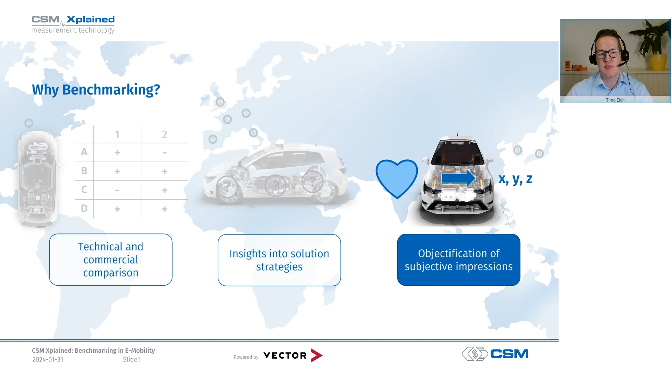Benchmarking is therefore also about translating these subjective impressions of end customers into measurable, comparable, and above all, objective parameters. Only then is it possible to make direct comparisons between different vehicle models. And overall, benchmarking is about a future-oriented analysis of the interests of the market and the models of competitors, as this allows the company's own model strategies to be aligned as profitably as possible.

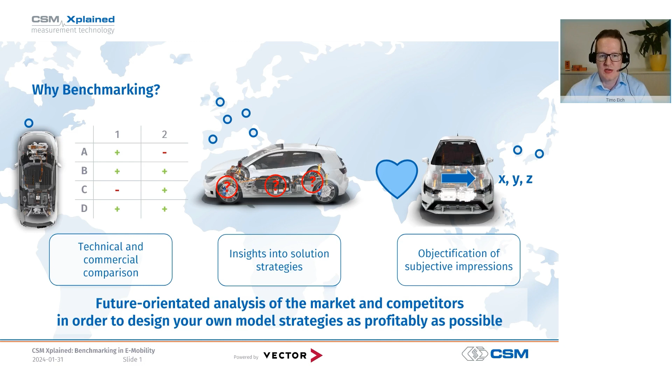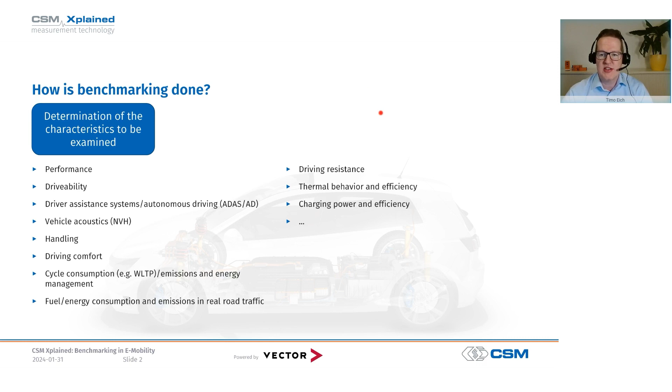How exactly is benchmarking implemented? Well, first of all, the properties to be examined are defined, and these can be a whole range of properties depending on whether we are aiming for overall vehicle benchmarking or even go down to component and small part level in design benchmarking. We have listed some typical characteristics here, ranging from performance, drivability, handling, driving comfort, energy consumption, vehicle acoustics, thermal behavior, charging performance, and so on. And as you can see, quite a lot comes together because behind each of these properties, there are many metrics that need to be measured and compared.

And behind these metrics are many physical measured variables, which then have to be measured in practice using sensors and measurement technology in the vehicle.

Here you can see an example of metrics for determining the performance of an e-axle. The metric to be determined is listed on the left-hand side here. For example, the maximum electrical power of the e-axle in the first line.

To determine the power, however, we need two real measured variables, namely high voltage and current, and then some complex math to calculate the active power. So for each of the metrics listed on the left, we must consider how precisely, meaning with which sensors and maybe some calculations, we can determine the corresponding metric.

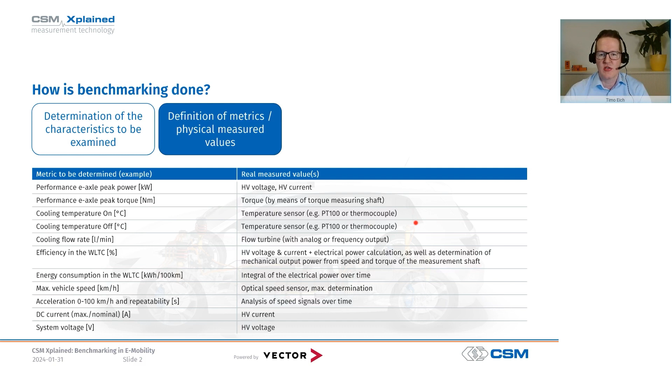Once we have determined the physical measured variables and the sensor required for this, we of course also need suitable measurement technology to which our sensors can be connected and read out.

And now it gets exciting because the measurements are typically carried out with a series production vehicle. And this production vehicle then has to be extensively instrumented. We will get to what's so difficult about this in a minute.

The measurements for benchmarking should be as realistic as possible and also as objective as possible. This means that the testing of different vehicle models should take place in standardized processes as far as possible. And for this purpose, defined environments are used.

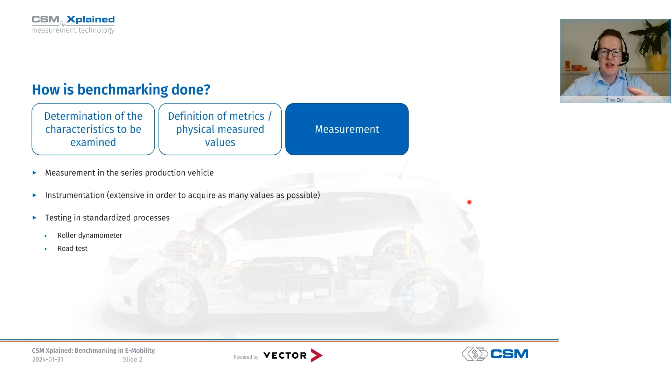For example, the road test is then driven in the standardized WLTP cycle, or the vehicle is placed on a roller dyno and driven through completely automatically. We do everything we can to ensure the best possible comparability of these standardized measurement procedures across different vehicle models.

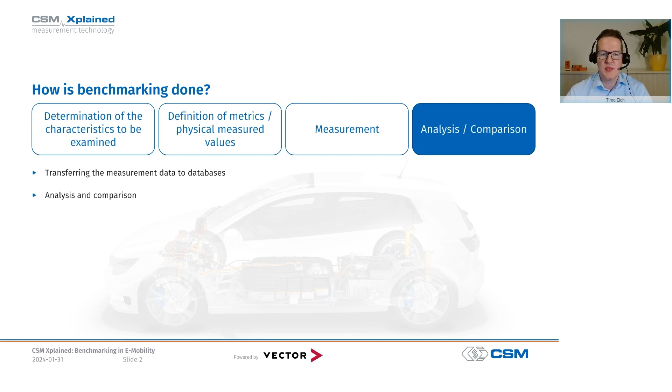And once the measurement data has been recorded, it is usually stored in huge databases where comprehensive calculations, analysis, and above all, comparisons can be carried out.

Now let's take a look at the challenges that benchmarking applications confront our measurement technology with. I earlier mentioned that the instrumentation of production vehicles can be quite exciting.

And this is because, unlike in development vehicles, we are dealing here with a fully coated vehicle, which now needs to be comprehensively instrumented. So the installation space for our measurement technology therefore becomes a real challenge.

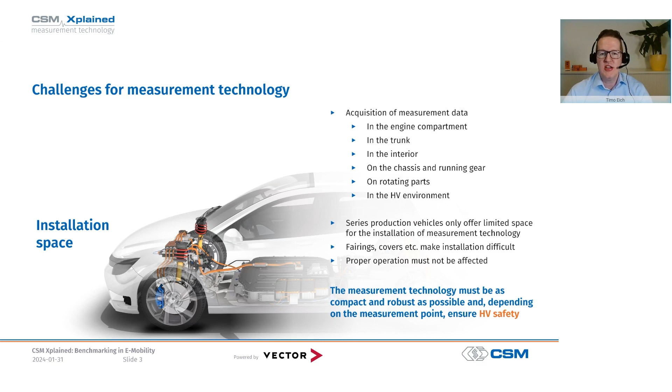And the measurement data has to be recorded everywhere in the vehicle, in the engine compartment, in the trunk, in the interior, on the chassis and the running gear, on rotating parts, and very important in e-mobility, in the high voltage environment. This means that the measurement technology used must be compact and robust, and that high voltage safety must also be guaranteed according to where we measure.

Such extremely complex instrumentation usually takes longer for a production vehicle than for a development vehicle and can quickly take several weeks. However, this also means that the measurement technology must be very easy to install.

In other words, it must offer suitable mounting aids for series production vehicles. Our CSM mini modules, for example, have housing eyelets for cable ties as a standard, which many of our customers find very practical. And the configuration of the measurement technology, the connection and the commissioning of the sensors, calibration, adjustment,

and so on, all of that must also be user-friendly and fast so that the measurement technology does not become a burden, but simplifies the instrumentation as much as possible.

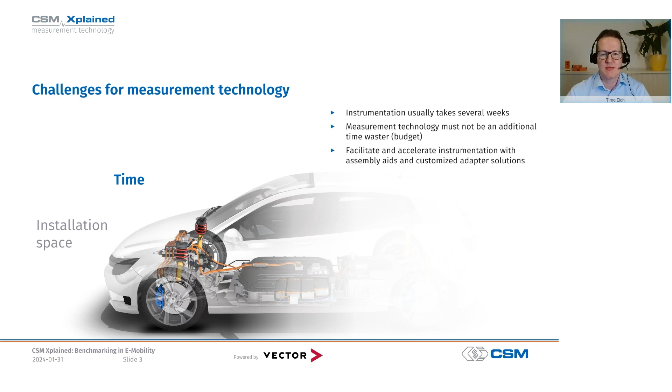Then, with the many different parameters that all need to be recorded at the same time, it is important to have flexible measurement technology that allows the recording of numerous different measured variables, and that the same measurement technology is always used for the different vehicle models, as well as for measurement on test bench and in road tests.

Because with the sometimes very small differences between the vehicle models, we need absolutely comparable measurement data, and it would be problematic if the differences in the measurement results were already caused by the use of different measurement systems.

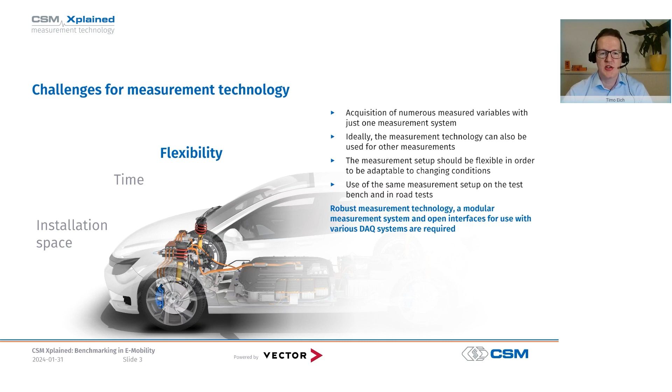In other words, we need robust and modular measurement technology for numerous measured variables, which can be easily combined into a flexible measurement system and quickly adapted to changing situations.

And we have already talked to some extent about the need for high measurement accuracy. This accuracy is simply important in order to reliably capture fast phenomena such as spikes and ripples and even the smallest differences in the measured values, both in terms of amplitude, accuracy, and time resolution. All in all, these are high demands on the measurement technology to be used.

So in the following, we take a brief look at the solutions and measurement modules our customers use to handle benchmarking applications.

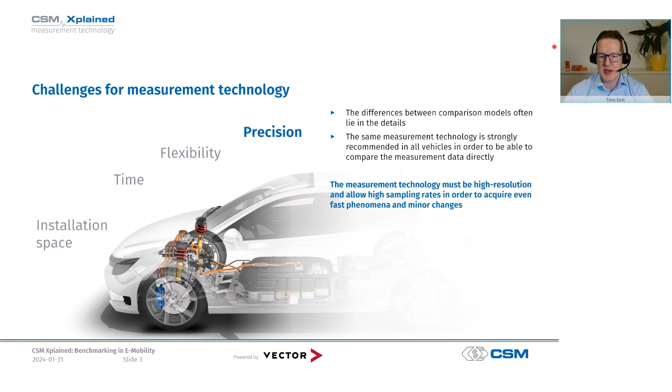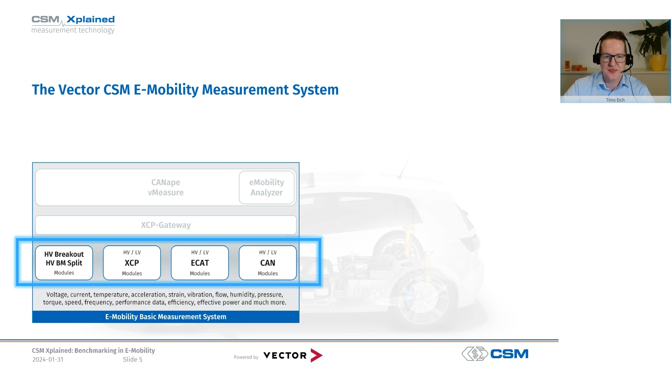Here you also find an excerpt of the measured variables that we can record with these measurement modules, but there's much more to this overall measuring system, because it includes protocol converters such as XCP gateways, powerful measurement data acquisition software tools.

Such as Vector CANape or vMeasure, both with the integrated e-mobility analyzer, which performs all the complex power calculations in real time, for example.

Also included are data analysis tools such as vSignalyzer and vMDM for managing huge volumes of measured data using databases. And included are also bus interfaces and ECU data acquisition.

For example, the VN and the VX interfaces from Vector, as well as the VP series smart loggers from Vector, on which the e-mobility analyzer is also available, and finally, fleet loggers from CSM.

It's a truly comprehensive toolbox for all measurements in e-mobility and therefore also for vehicle benchmarking.

And to make this quite abstract illustration more concrete for you, let's take a closer look now at a few examples of how these tools are used in practice.

Just imagine that you are traveling with your electric vehicle in a relatively hot region, perhaps in Australia, and you now have long distances to cover between your destinations. As it is summer season in Australia, it's very hot outside. Then there could possibly be a conflict of interests.

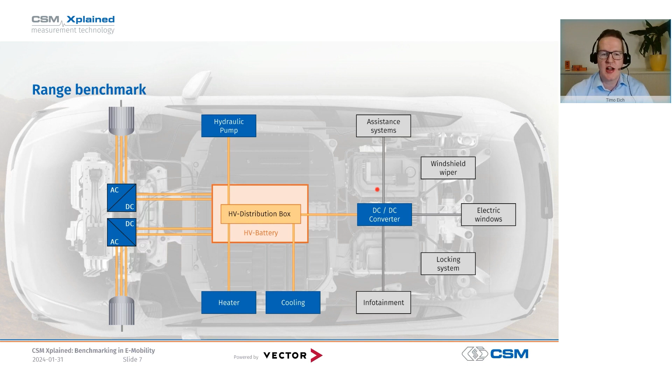And if we now want to determine the power consumption of these auxiliary consumers, we need compact and very precise current sensors, and in many cases, quite a lot of them at once. For comprehensive investigation, this can easily result in a 3-digit number of current sensors.

One of these current sensors that our customers like to use in the low voltage range is the CSM shunt. As you might know, a shunt is a precision measuring resistor that is integrated into the cable to measure the current. In addition to the measuring resistor, our CSM shunt also consists of a compact, robust housing suitable for road tests and an active measuring amplifier for signal conditioning.

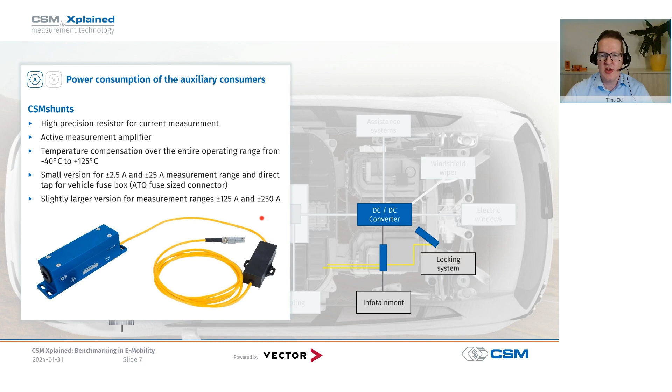Here we see the slightly larger version of the CSM shunt for the 125 and 250 amps measuring range. And here we also see the smaller, even more compact version for the 2.5 and 25 amps measuring ranges.

And the special feature here is the version with the plug for the fuse box. This means that we simply unplug the corresponding fuse, plug in the CSM shunt, plug into the fuse box instead, and then plug the original fuse into this fuse holder, which is integrated into the CSM shunt's cable. In this way, the fuse function is retained, and we can measure the current consumption directly at the fuse box very easily and, above all, non-destructively.

And the CSM shunt is then simply connected to an analog measurement module, for example a CAN AD measurement module, and we will take a quick look at these modules in a minute.

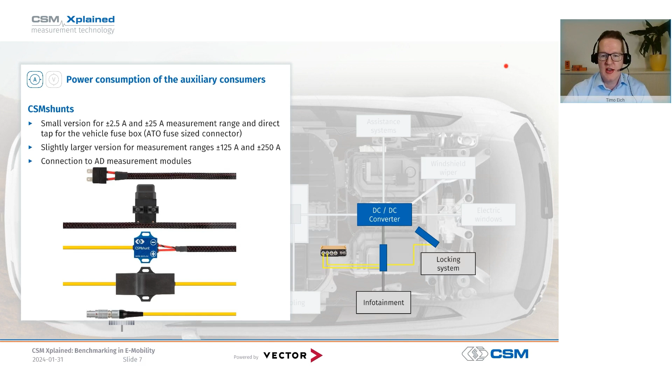But before that, I'll show you another sensor variant for current measurement, namely the CSM current clamp, a clamp type current transformer that allows simple, fast, and, very important in benchmarking, non-destructive installation and accurate current measurement. The difference to the shunt is that the clamp does not have to be integrated into the circuit, but is simply clamped around the conductor. And as this is a non-contact measurement method from an electrical point of view, we can even use the CSM current clamp in high voltage applications without any concerns.

And the great thing is that we even have a usable bandwidth of up to 2 megahertz available for the e-mobility sector. Of course, we can no longer achieve 2 megahertz with a CAN measurement module, so we at CSM use EtherCAT measurement modules for this.

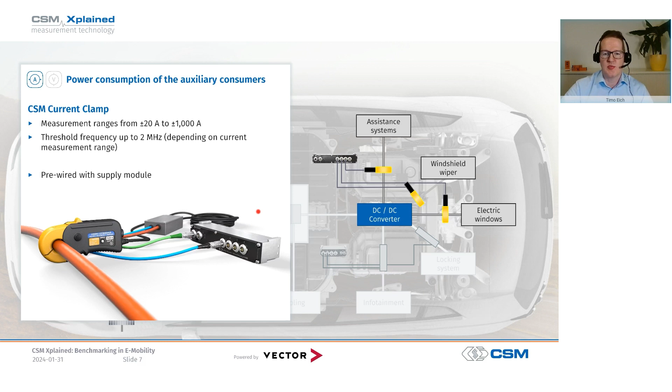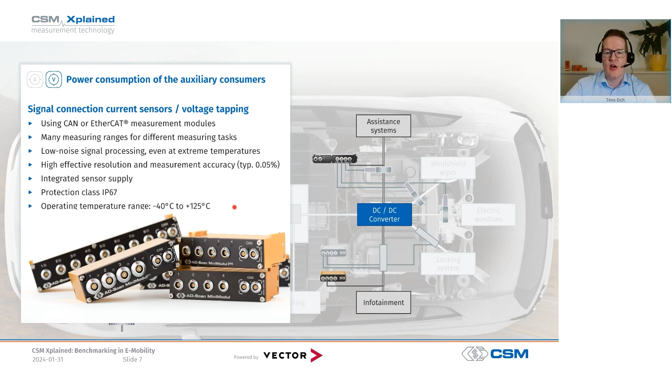And this is where we now also see our AD measurement modules for CAN or EtherCAT. These devices offer the corresponding measuring ranges for conditioned measuring signals and extremely low noise signal processing with high effective resolution and measuring accuracy. What's more, these modules also provide sensor supply for the sensors to be connected, and the CSM shunts, for example, can then be supplied with voltage directly from an AD measurement module.

Let's move on to another application, namely the investigation of the efficiency of voltage conversion by DC-DC converters from high voltage to low voltage. And for this, we need not only the power consumption, but also the power before and after the voltage converter. Here in the picture we can see a very common related application, namely determining the efficiency of the traction inverters.

And it's precisely for such simultaneous measurements of voltage and current that our high voltage breakout modules are made for. The great advantage of these modules is that we can calculate the power parameters such as active power, reactive power, apparent power, power factor, and the effective values of current and voltage on board directly in the device in real time, and then transmit them directly in digital form.

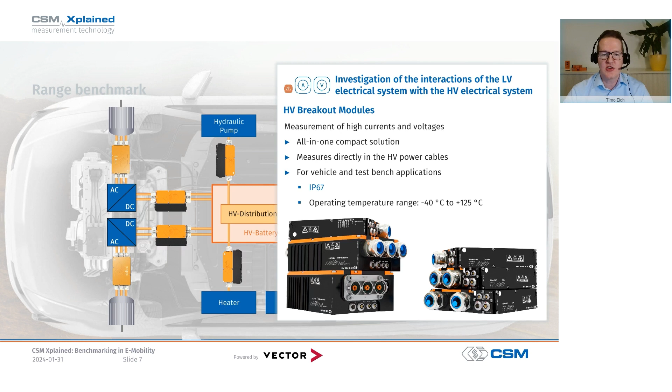The high voltage breakout modules also measure the current using the shunt technology, and so we have to cut the cable to integrate the shunt into the cable. And since this is often problematic for benchmarking applications, we have come up with a special solution.

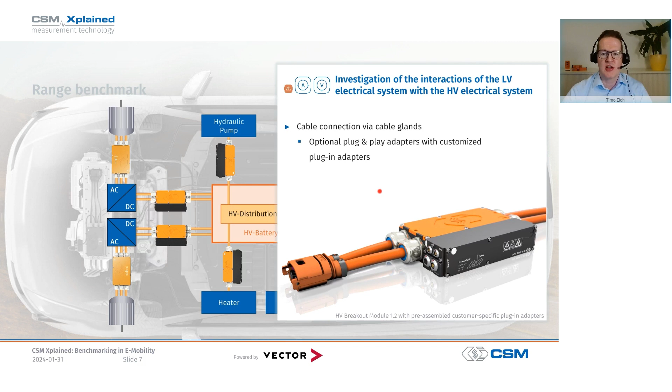Because at CSM, the high voltage breakout modules can be fitted directly with cable adapters consisting of the original connector systems from the vehicle. And then the original cable is simply unplugged and removed and replaced or extended with the cable instrumented with the high voltage breakout module. In other words, completely non-destructive integration of the measurement technology for benchmarking purposes.

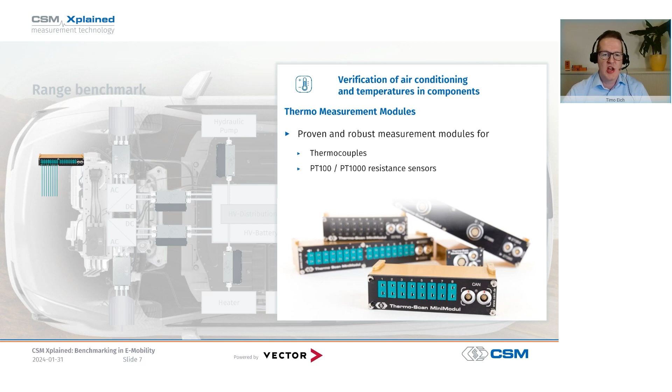Another application we had was checking the air condition and component temperatures, and our temperature measurement modules for thermocouples and RTD resistance thermometers, which we can see in the picture below, are ideal for this. For temperature measurements at high voltage potential, we also have corresponding high voltage safe variants in our portfolio, with which we can precisely and safely measure various temperature sensors at up to 1000 volts potential.

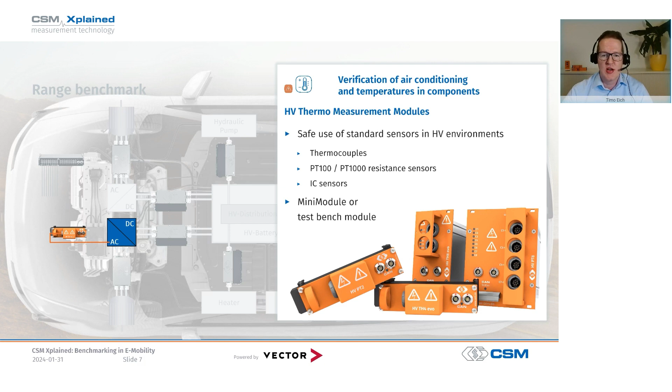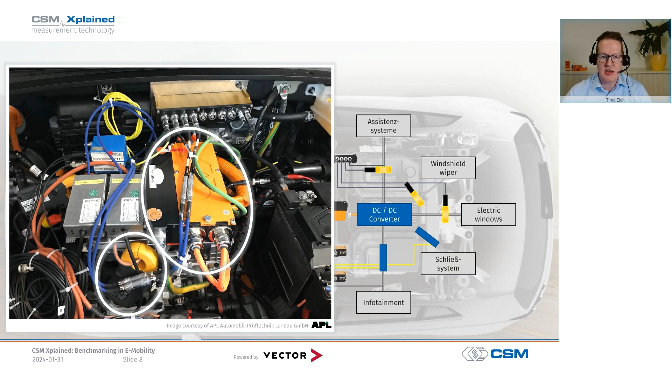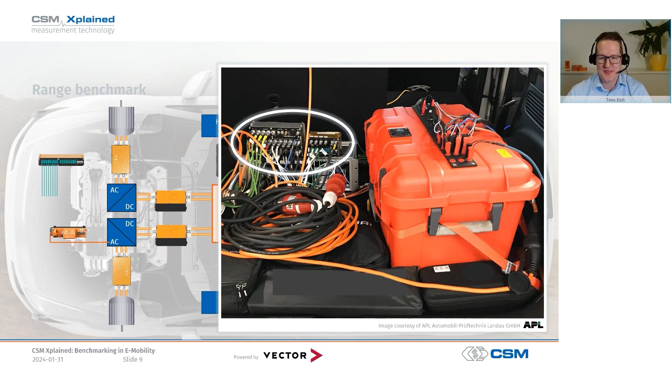Here you can see the overview of the analog measurement modules that we just used in the example, meaning in principle all measurement modules and sensors for voltages, currents, and temperatures for low voltage and high voltage applications.

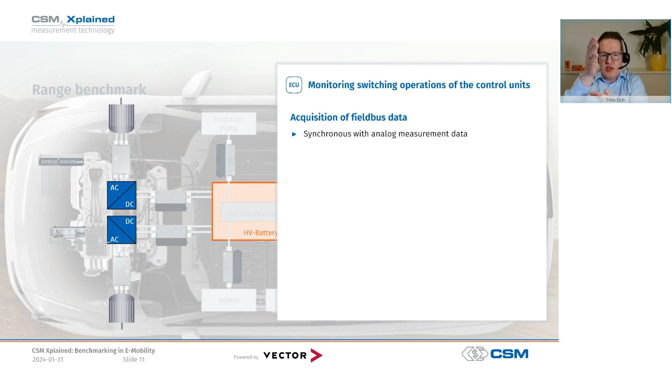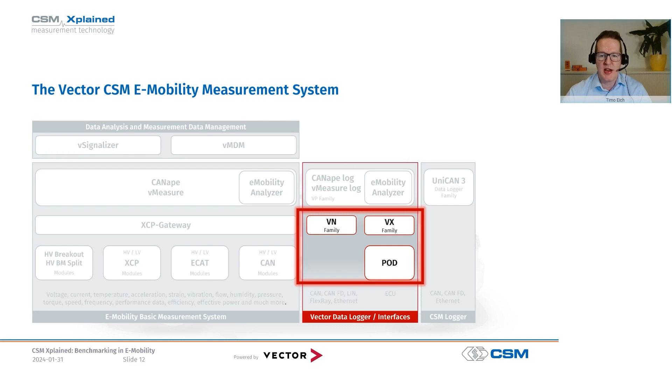But that's not all, because in most cases, the data from the control units or the entire bus communication is also important for the benchmarkers. The decisive factor here is that this bus data is recorded absolutely synchronously with the analog measurement data. Our partner Vector Informatik offers the VN interfaces for this purpose, which are also part of the Vector CSM e-mobility measurement system. These VN interfaces give us access to a wide variety of bus systems in the vehicle, and it is particularly practical that we can also record the fast ECU data and the analog measurement data completely synchronously using, for example, the IEEE 1588 synchronization method.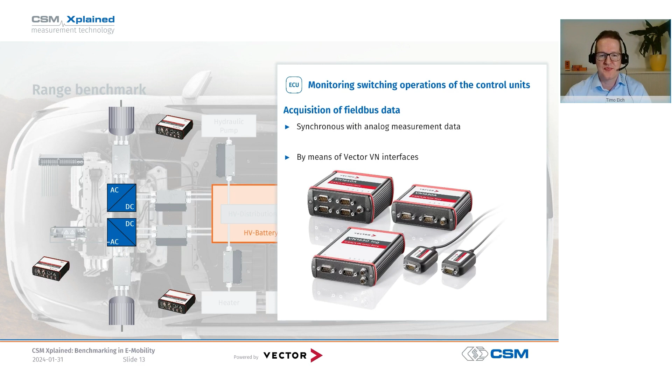Now the question is, how do we record the data? For this, we can use the VP series smart loggers from the Vector CSM e-mobility measurement systems, for example, or a measuring computer with data acquisition software such as Vector vMeasure or Vector CANape. But, for example, ETAS Inca could also run here.

The nice thing about staying in the Vector landscape, however, is that the e-mobility analyzer is then available to us as a fast function library for comprehensive real-time analysis in the area of power and efficiency measurement. With its comprehensive function library, the Vector e-mobility analyzer offers us a wide range of calculating functions and analysis that we can easily configure via wizards, which then make the calculated results directly available to us online and offline for further data processing. With these fast functions, we also save valuable time when measuring and analyzing.

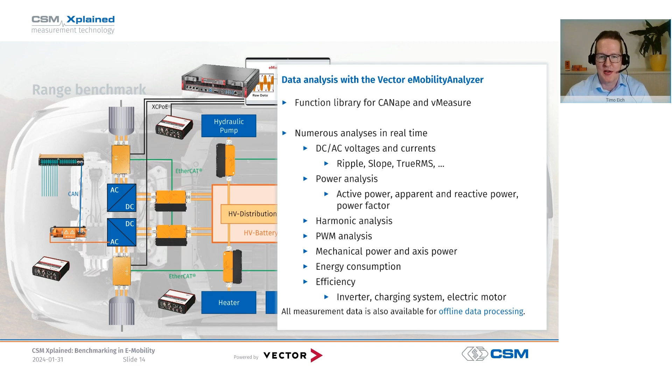Thanks to the measurement data obtained in this way, the databases can now be fed into benchmarking, and the data from one vehicle model can be compared with other models tested in the same way, in order to draw conclusions for our own strategies for balancing comfort and range, for example. The Vector CSM e-mobility measurement system is therefore a comprehensive and powerful toolbox for almost all measurement tasks relating to benchmarking.

But that's not all, because in addition to our partner Vector Informatik, we have other strong partners on hand to expand our options for benchmarking applications. For example, the acoustic specialists at Mueller BBM VibroAcoustic, whose hardware and software solutions can be used to conveniently carry out the acoustic interior investigations mentioned at the beginning, and our partner Axon Systems, specialists in the field of telemetry and measurements with strain gauges for many chassis and suspension applications. Together with our partners, we can therefore offer practice-orientated hardware solutions that reliably solve the demanding tasks in the field of benchmarking.

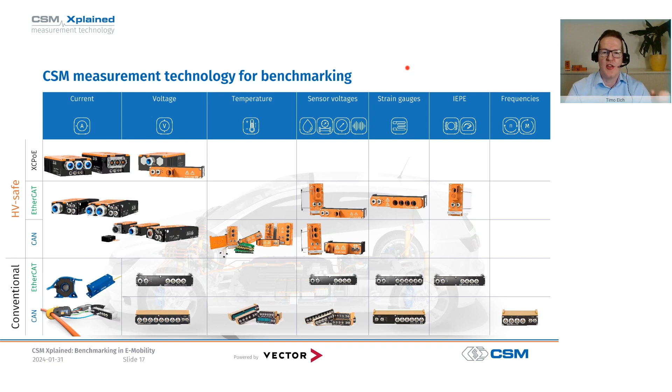And that is why I would like to invite you to join us. Let's work together to turn unawareness into knowledge, so that your vehicles can remain at the forefront of international competition, now and in the future.